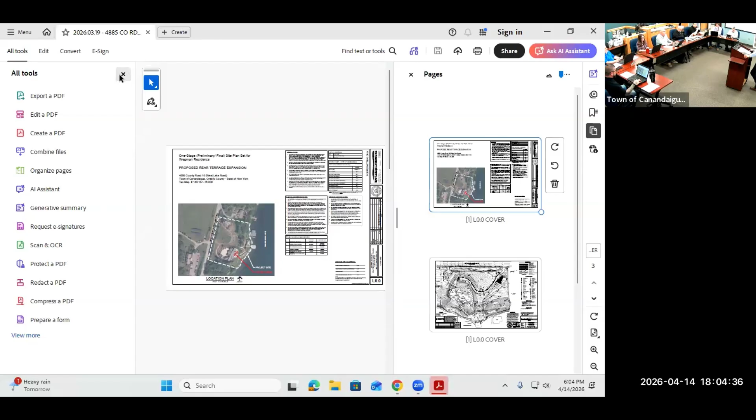All righty. Anybody else want to address the board regarding an item not on the agenda? If not, let's go to the agenda. First of all, we have no legal notices that required publication regarding the applications this evening. We have a continued subdivision. We have a site plan and a sketch plan to review. So with that being said, let's move to CPN 2026-018, Bayer Landscape Architecture, representing a property owner at 4885 County Route 16. The applicant would like to expand the terrace, which would require excavation and or filling of more than 5 cubic yards of material within 500 feet of Canandaigua Lake in the RLD zoning.

And Mark Bayer representing the applicant. Good evening, Mark. Good evening, everyone. How are you tonight? Mark Bayer, Principal of Bayer Landscape Architecture, and I'm here tonight with Josh Raymore, who works in the studio with me, and we are here to talk about 4885 County Road 16. It's a very minor project that we're proposing, but enough that we cross the threshold of 5 cubic yards essentially.

And so the project is simply a rear terrace expansion. The existing terrace on the back of the house is right here. The owners want to simply expand this terrace east. There's an existing wall system that's here in yellow. And this is a planted slope right here between the existing terrace and the wall.

And we are proposing to raise the wall so we can level this area and expand the terrace paving about 10 to 12 feet to the east. And that's, you know, essentially what we're going to do. It's about 462 square feet of natural stone paving that would blend with what's there.

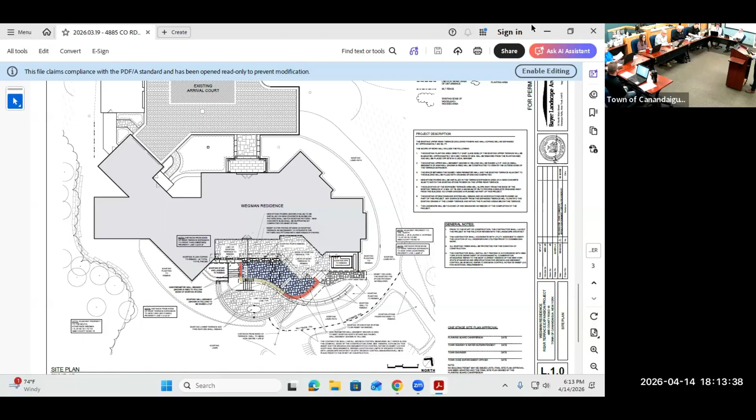Give me a second. Second. Motion and second, any discussion? All in favor? Aye. Opposed? Thank you, Mark. Thank you. Have a good night. Motion carries.

All right. Next item on the agenda is CPN 2025-125 for a development on County Route 16, really off of County Route 16. It's a development of 38 single-family homes, applying the conservation subdivision provisions. Ryan, good evening. Good evening, Ryan Destro from BME Associates here on behalf of Venezia Associates. We are here for preliminary subdivision approval for the Ashton Place South subdivision.

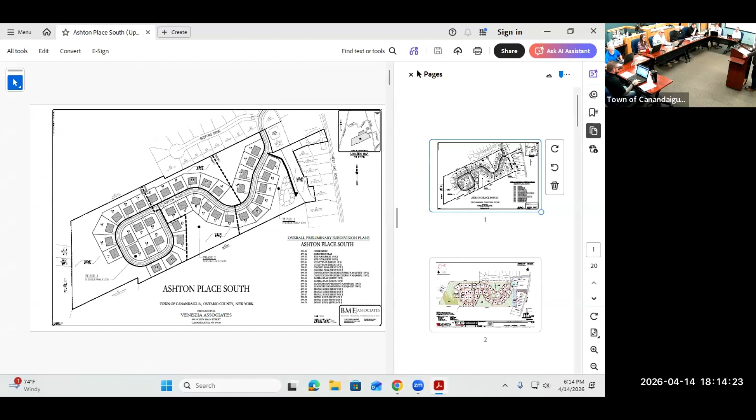Just to recap from our last appearance before this board, we have submitted updated copies of the overall preliminary subdivision plans as well as the project SWPPP, which includes the engineer's report. We've also provided a draft copy of the conservation easement, which includes the outline of the management plan for the conservation easement areas. As a reminder, the goals of the town code for section 174-16 cluster subdivisions include, and I will quote, achieve a balance between well-designed development, meaningful open space conservation, and natural resource protection in the town of Canandaigua by requiring conservation subdivisions instead of conventional subdivision.

The next goal, allow for residential development on lots that are smaller than would otherwise be permitted in the applicable zoning district in exchange for the protection of conservation assets identified in the town's inventory. The next goal, encourage the placement of lots and design of streets in a manner that results in a more efficient provision of infrastructure and delivery of public services that supports a walkable and socially cohesive community. Next one, maintain and preserve the natural, agricultural, scenic, and cultural assets identified in the town's natural resource inventory, and also advance the goals of the town's comprehensive plan. This project and this layout meets all of those town goals just specified.

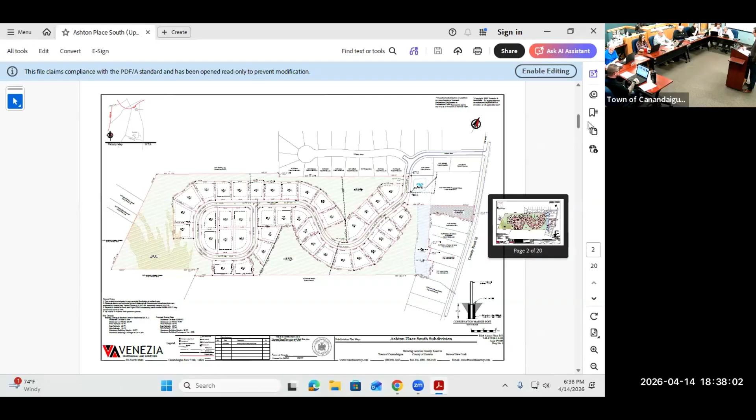Yeah, so our storm drainage calcs did account for a certain percentage of the rear yards that were not being conveyed to the stormwater management facility in that scenario.

So again, you have an extensive bypass swale system that is proposed, and I assume that's only designed for the 10-year storm. And I think that once you get beyond the 10-year storm, or you get into extreme storms with high rainfall intensity, you're going to have overflow, and you're going to have a blending of the runoffs. Those are assumptions.

And the reason I'm allowing this discussion to go on is because stormwater management is probably the prime concern of this whole application. So we want to make sure we get it right. Tim, we certainly appreciate what you're adding.

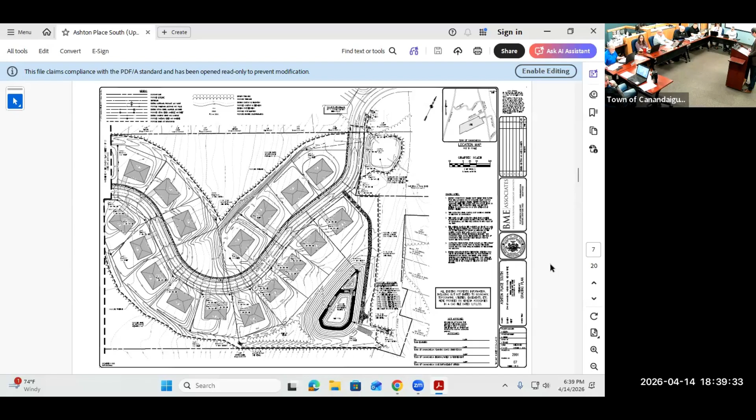I'm not going to do your engineering for you, but you have proposed CN numbers of 69 for area A and 61 for area B. And again, based on the information in TR-55, my guess is that those numbers should be somewhere between 78 and 83. Certainly, given the soil conditions that I observed out there, I don't know whether you're using a B-type soil. Are you claiming that those are B-type soils?

We're using the official USDA Web Soil Survey soil data. Which is, for that area? The majority of the site is B soils, correct? I wouldn't agree with that. I think that we should have a discussion about whether we should have soils tested to support that. A B type of soil is a very well drained soil. And that wasn't what I've seen out there on that site.

Doesn't the county do soil surveys? It is from the county soil survey, it's data from the county soil survey. It's available online and it's USDA. It's available on the Web Soil Survey, which accounted for the county soil survey data. It's all grouped together in one online format.

The other thing that I'll add for the board is that typically, if you think about this, you want rich topsoil for your lawn to grow. And rich topsoil typically has a lot of loam in it. And that means that it takes water and then acts as though it's impervious. So it's initial absorption and then it's all runoff. This is not typical of, say, New Hampshire soils where you have sand, grass grows in the sand, it rains, it's dry, or North Carolina.

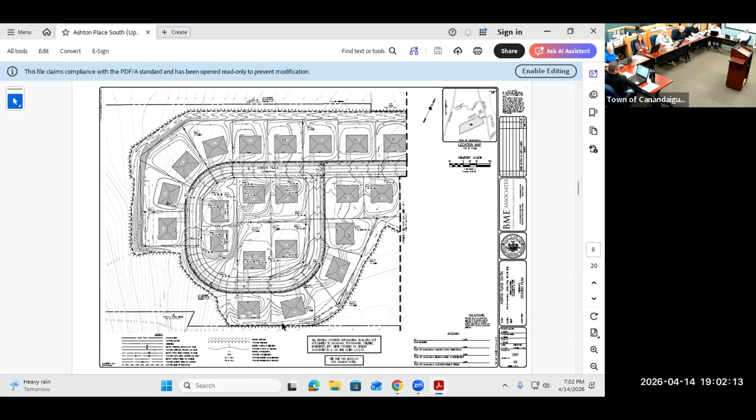Mark, you made mention of a secondary pond potentially in an environmental easement. Where would that be? Is that phase 3, top of the hill? And if done in phase 1, what could that do for the overall calculations of everything we're talking about to try to get to a common ground? The area that has been identified by Kevin on exhibits is actually the triangle area in the south central area of the project site. Another area to consider will be off site to the north too. The phase 2 dot essentially? Yes, yep.

And have there been any calculations on all of these questions based off that secondary retention pond, to help all of this go into a simpler discussion of getting us further down the road? Full analysis of a secondary pond has not been performed to date. Questions are who would actually install it, who would maintain it. So there's some matters at hand that would need to be resolved. But I think our thoughts were, as long as we had the land set aside, it'd be designated as a potential future basin. As long as that's covered in the plan, if needed, that's essentially the way we were looking at it.

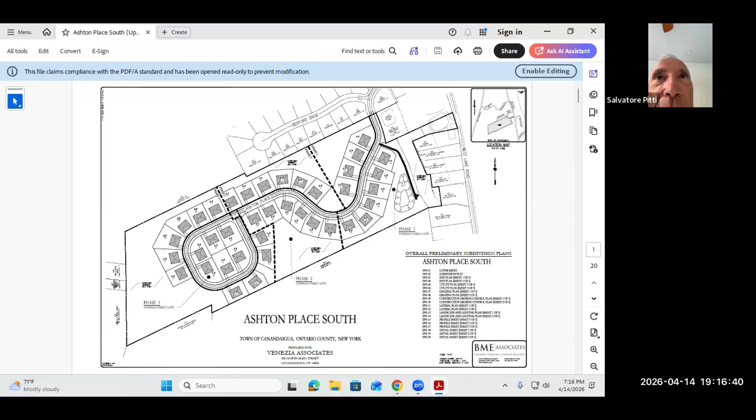Yeah, I spoke to Jack Brown from the sewer department. He was going to ask that it was included in the subdivision approval. I don't believe we saw that in his comments, but it's duly noted. That would mean that then that area, your property, would be riper for development with the sewer. I don't know if that's something this board or the town board would be looking at, but anyway, is there an easement being provided to the property to the south? No. Maybe. Well, I saw no.

But we'll certainly listen to anything that the county has. I know they were against the sewering of the properties up on Middle Cheshire between Fox Ridge and Middle Cheshire. They actually didn't really want to extend the sewer in that area back when the Fox Ridge extension was done. So whether they'd be interested in extending it toward your property, we'd like to hear from them. I'll reach out to him again tomorrow and ask him to send you an email or something.

Okay. Anything else, Sal? No, I guess not. Okay, sir? Would you like to address the board? Kim, in the interim, can you mute everyone online and they can raise their hand to address the board?

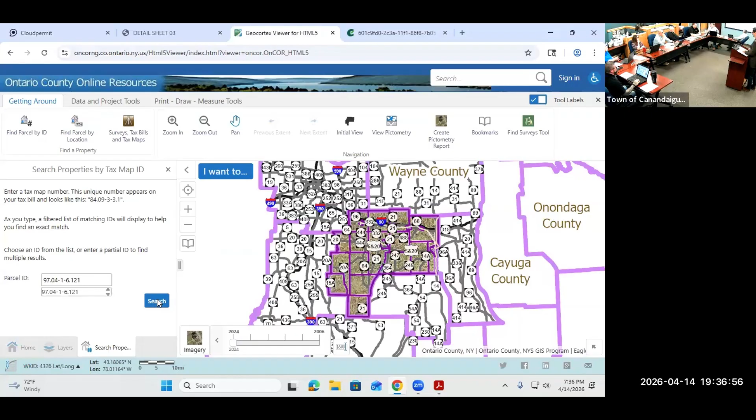Oh, one more thing. I just looked at OnCOR. What is your plan to do with that property that goes to County Road 16? Cause that's part of this parcel. Yeah. There's a plan to, what's the term? Convey it to the adjacent parcel that's on County Road 16. The cottage there or? Yeah. Well, my real question was: could they convey that current pond that's there now? Cause that's the cottage land.

No, it's not the cottage property. No, I understand. No, the cottage owns that pond though. Yeah, so if you were to take over that property, and you're saying doing a lot line adjustment on the other one to County Road 16, then you'd be controlling all the water. Well, they would have to agree to that. I know, that's outside of the scope of the project, but just to answer, this would be donated or conveyed to this parcel. Oh, that part. Well, that's shown on the subdivision sheet. Called out, and I had a potential condition if it goes through the lot line adjustment.

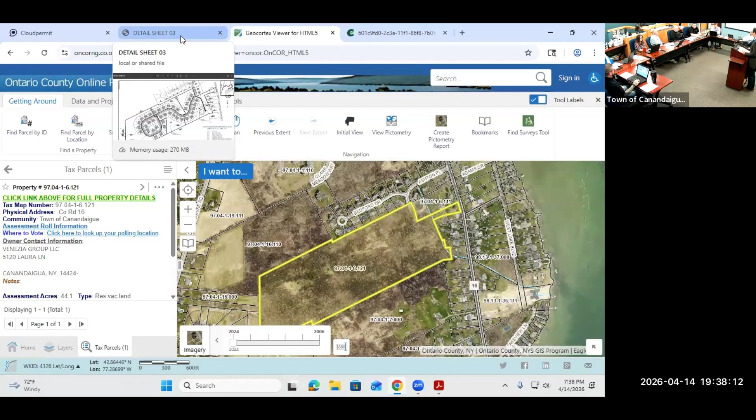Who's responsible for the maintenance of that other stormwater management facility? The town. Ashton Place, currently Town of Canandaigua. Even though it's on someone else's property. There's an easement. Yeah, it needs work. I walked around it. Yeah, and the easement actually extends onto this parcel as well. It extends west from the pond.

So Ryan, last thing I want to ask is, what waivers are you requesting? I noticed there's the 40% from class 3. That's it. Constrained lands, that's it? Yep. Okay.

Was there a formal waiver request? I had asked for that previously, but I was just able to receive it. I think it was buried in the town website, and someone was kind enough to find it for me. So it's not on the workspace, so has it been executed? I just got it emailed to me right before the meeting. Okay. But I did note it in the letter of intent, regarding the conservation easement analysis.

But as noted, the trees are not what you would consider significant. Yeah, ash and black walnut. Pretty junky. And you had to be 40%, and I think you were 36.9 for your class 3. Yeah, we were close. Okay. And then the other portion of that was the land visible from the lake, and we provided an exhibit that shows that.

Okay, and you redid part 1 of the SEQR at the request of, I think, the concerns that MRB had. Yep. And MRB has done a part 2 and part 3. So make sure you look at that for the next meeting. And anything else, other than please take into consideration what Tim requested this evening.

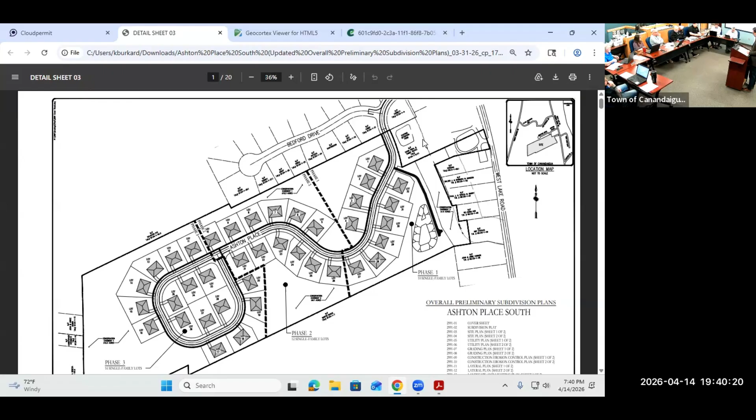You had mentioned a powwow with the powers that be regarding the stormwater. So that will occur next month. And I think you're looking for a month extension, for continuation. Correct. Okay, so that would be our first meeting in May, May 12th. Okay. Anything else? I was just saying, Amanda, I'm ready to move.

I was going to confirm, if we're meeting on May 12th, when would we need any revised materials by? 2 weeks prior to the meeting. Normally we do one, but 2 weeks in this case because of complexity, to give time to review. So 2 weeks from today would be the deadline. Is that enough time, or do you want the second meeting? If we could have the second meeting just to be safe. Okay. So it'd be May 26th. Then we would need material by May 12th, or sooner would be better. Okay.

Okay, I have the motion to continue this application to the 26th of May. Second. All in favor? Aye. Okay, the accompanying application is still hanging out there, but I think the applicant has agreed to continue the phase 1 final, because we obviously have to get the preliminary tied down before we even think about the final. So that'll continue to at least the 26th. Agreed.

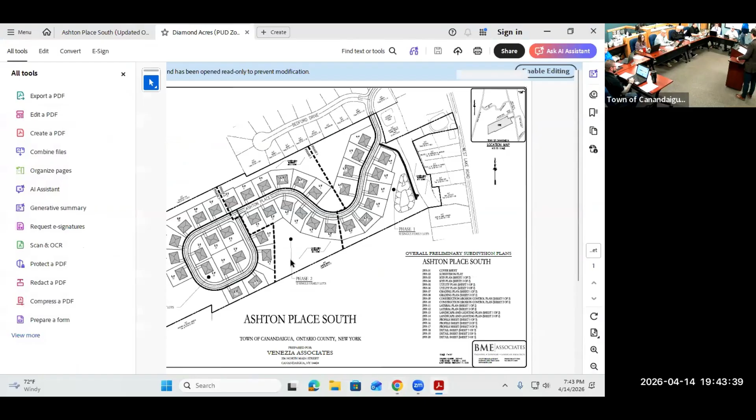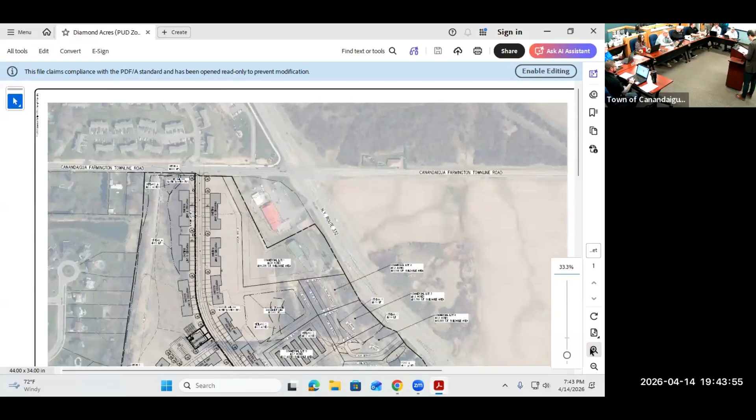Well, if you could, do the talking outside in the hallway. I'll wait till you leave. Thanks, Kevin. Have a good night. See you, bud. Okay. Didn't scare everybody off. That's good. Thanks for staying.

All right, CPN 26-023 is, as I said, a sketch plan review, part of a rezoning request to rezone 75 acres of land off of 332 in the area of Purdy Road, between Purdy Road and Canandaigua Farmington Town Line Road. It's currently zoned AR2, CC commercial district and R1-20. It would all be rezoned as a PUD, a planned unit development, with 226 rental townhomes, 9 for-sale single-family homes, and 6 commercial lots. We are here to hear the application and make a recommendation to the town board.

Good evening once again, Ryan Destro from BME Associates. I'm here with the applicant, Sarah Janeco, representing Leo Janeco and Sons Incorporated. We are here to review the proposed Diamond Acres PUD development sketch plan. We did appear before the town board a few weeks ago to introduce the project to them as well.

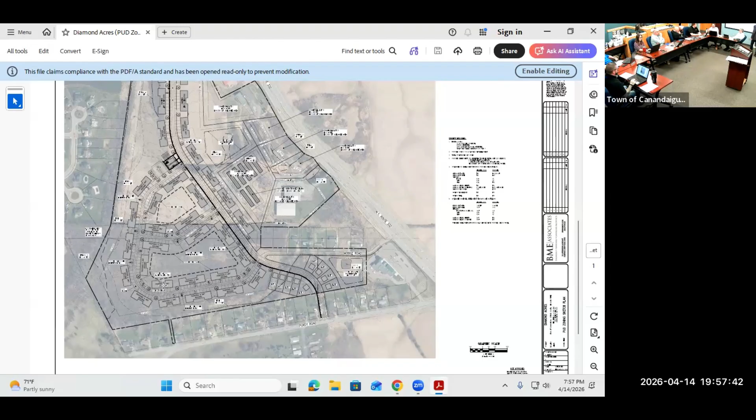What are you referring to as the buildings going through the wetlands? Your sketch plan shows the wetlands to the edge. Yes. Right, and I know the exhibit that I provided, the figure I provided with the overlay and the wetland mapping that we did, MRB, and unless my shadow lines are just different, on your report on page. Right, yeah, okay.

BME did go out and delineate the wetlands last fall. We have submitted a wetland report to the DEC and Army Corps of Engineers. There are no wetlands that would qualify as DEC wetlands on this development. The wetlands that we delineated are the limits that we're showing on the property now. The Army Corps will come out hopefully this spring, early summertime to confirm our limits. Obviously, we will adhere to any standards, whether the wetlands need to be mitigated or we need to stay away from them.

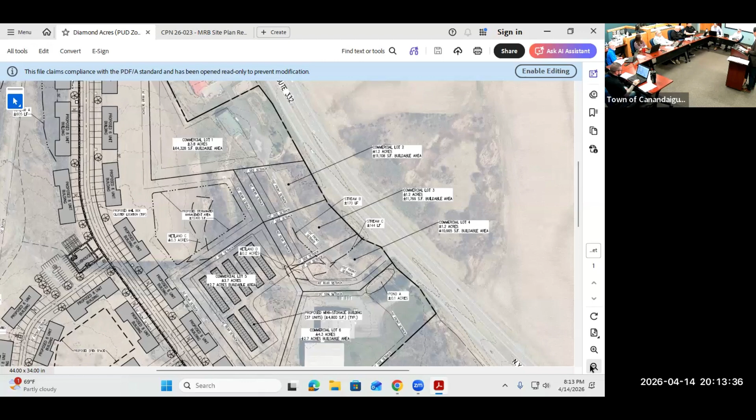There's a couple things I just wanted to bring to the board's attention. You touched on a few of them. They're in our letter, but so these commercial sites, and you have your standards over here, like you're not modifying the setbacks from 332, which then leads to all this unbuildable area. Do you have an interest in making more of that buildable so that you could improve the property more, potentially create more usable square footage for commercial spaces and raise the assessed valuation of the town? And since you're going through this process where you can modify these standards anyways, just a thought for the planning board as well.

And then you also have the roadway shown right now in the buildable area that you're providing there, which then further eats up some of the land that you might otherwise develop. But can you move that roadway back towards the back property lines and share and be out of the buildable area of those lots? Yep, we can look at that.

So we talked about walkability with the board, but it seemed like the focus is mostly on providing the infrastructure to walk, but not the network and connections to walk. So in my letter, if you were living here and you wanted to go to dinner, whatever ends up being there, you would walk here, you go around, right? And it ends up being, I think, 3,000 feet or something like that, but it's only a few hundred feet, right? That's how you get your steps in. So can you provide interconnections so that pedestrians from these places can walk to whatever those commercial spaces end up being? Yep.

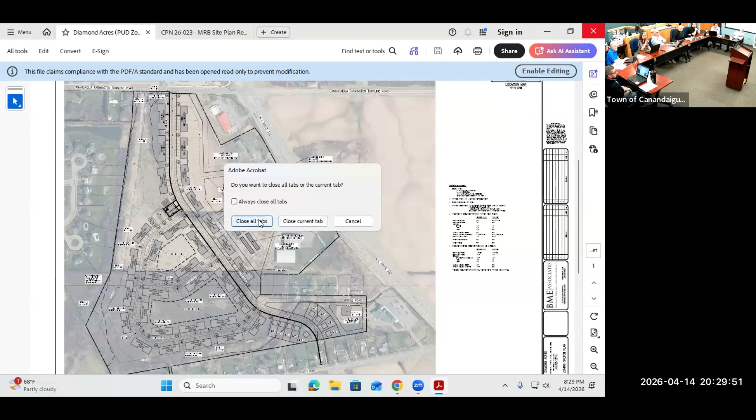All right. Thanks again, folks. Let's move on to our minutes. Thank you for your time, everybody. Oh, this gentleman was. Oh, I'm sorry, you're hiding behind the podium. Speak now.

My name's Rod, 5795 Farmington Town Line Road. If you look on the map, I'm almost to the access driveway. I'm 1000% on board for this project, especially the sidewalks. Right now we walk Town Line Road 332 to get to the ice cream shop with two little boys. No fun there. We usually take that little access road now, so the sidewalk is awesome.

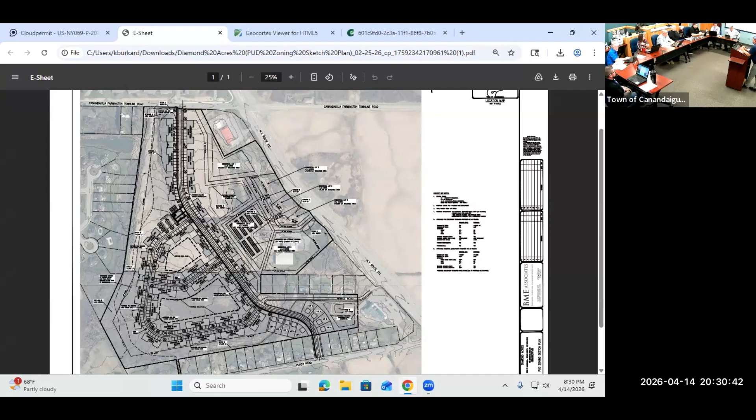The only concern I would have is hopefully the possibility of tying into town sewer when it gets into that area. Because of the clay and the drainage up through there, it goes north to Town Line Road and across the street. So you're on septic right now. Yeah, the clay is awful, especially in the wet time of year. There's a retention pond beside my property, and that seeps into the clay. Our leach field is pretty saturated with all that water. I've been trying for 7 years, so if we can tie into that somehow, that'd be awesome. Those are the only two concerns I have.

Where do you tie into town sewer? So theoretically, the previous plans for the Pretty Road extension had the sewer coming out somewhere through here, and then going up this way. But you wouldn't bring it all the way to Town Line Road. You'd stop at those last two buildings. I can't say where we would go. But there's not a necessary connection to here. These houses would have sewer, so maybe we'll be able to do something. We're happy to look at it. Okay. Rod's been wanting sewer 7 years.

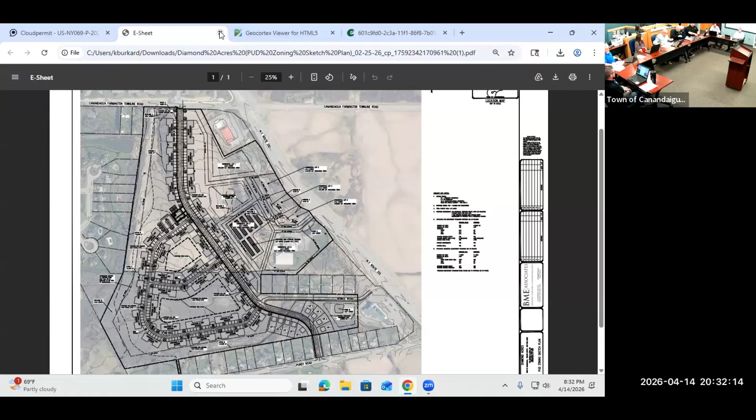All right, last call, anybody? Okay, let's move on then. Minutes from our March 24th meeting. Do I have a motion? Any further additions or corrections? If not, second? Second. Any further discussion? If not, all in favor? Aye. Thank you. Nice job, Curry. Thanks for coming out, guys.

Oh. You're welcome to come back anytime. Hang on, I just noticed we had one. Diana, would you like to speak?

Well, she had. Hi. Hi, Diana. You have a question?

Yeah, I just commented. I had the same concerns as the other two residents of Stablegate Drive, so I feel like they covered it. The lights are what I was really concerned about. Right now, when I look out my bathroom window on the second floor, I can see lights coming from, I believe it's the Geneco warehouse. And I'm looking at that sketch map. I just see everything from my property to that, and it's just overwhelming looking at how many buildings and the traffic and the cars and the lights.

So I think you guys were talking about maybe having something like a barrier in between, which would alleviate some of our concerns over here. And I just wanted to reiterate it's almost like flooding in the back of our house. We have a little hill that leads to the current stone area, and that little stone area is right behind all of those buildings back there. And the water just comes down and rushes through all of our properties back here. So that was also one of my concerns.